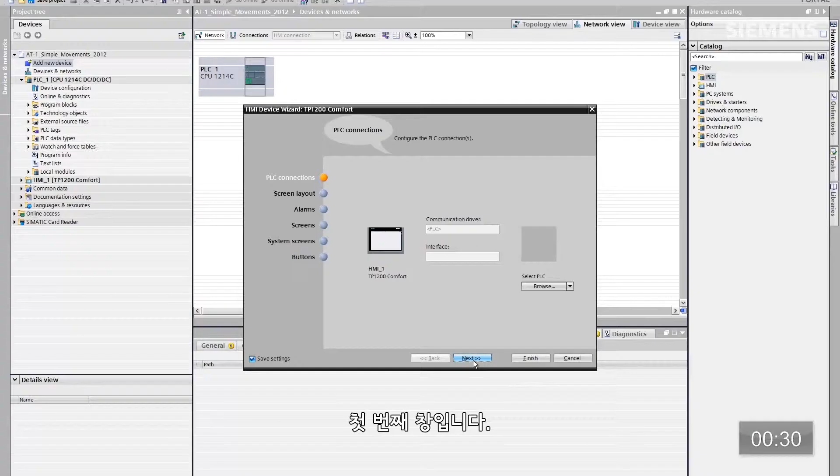So ultimately what the portal is doing for us at this point is actually creating a wizard for us. We're going to have a pop-up box that easily walks us through the entire HMI architecture we want to use for this particular system. There's a PLC connection as the first button, we're not going to use that. We don't care. Click on Next.

You can change the background color here, screen title, navigation field, date, time, logo, whatever. We're going to leave those defaults. Here's the alarms. We're going to keep the defaults as well.

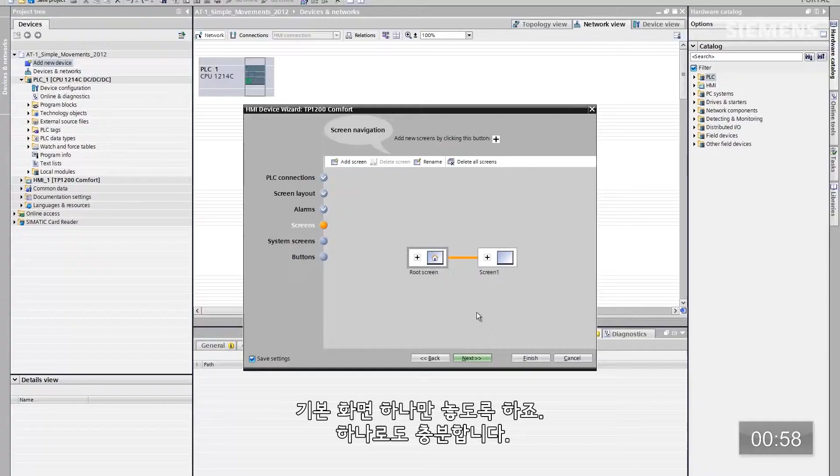The screens. Here you can actually create your standard architecture of your screens. That way every single time you have a new HMI you can easily go through the wizard and create those screens very fast and efficiently. We're going to leave root screen and screen 1, that's no problem. System screens, we're not going to use any.

And the buttons, as you can see, for instance, for this application I want to move them to the left instead of the bottom, and I can easily manipulate the system buttons back onto this with just dragging and dropping them on. And there are my system buttons on the left-hand side now.

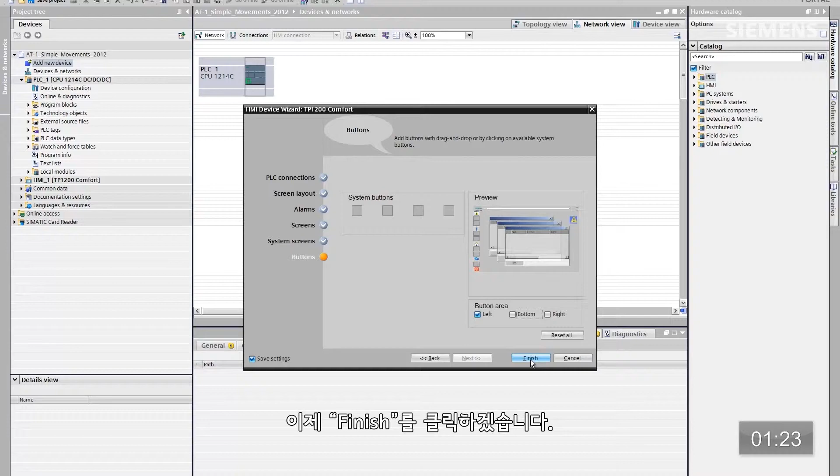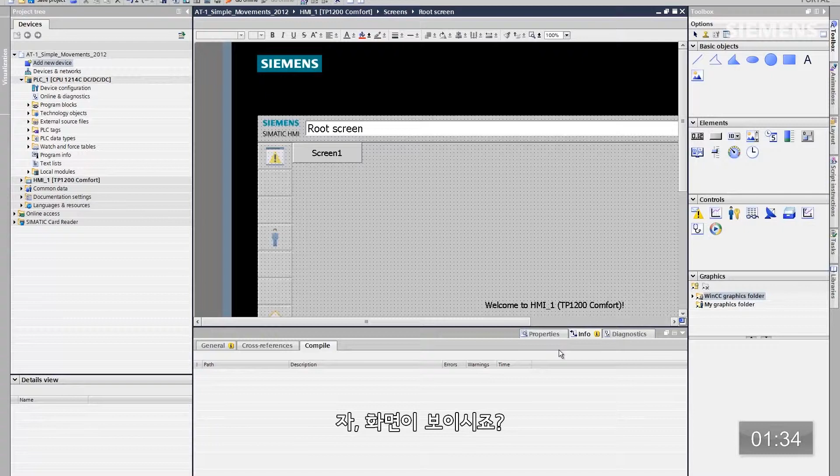At this point, I want to click on Finished. So ultimately, what the portal is going to do for us is going to give us a photorealistic view of this HMI and the screens we just created. Here they are. Let me minimize this and go to Fit to Screen.

So here's our root screen. If we want to add a new screen, all I got to do is go back here in the tree structure and just double click on Add New Screen. Again, it'll give us another photorealistic view of that new screen.

Click on Fit to Screen, and for instance, if you want to change an attribute of that screen, now that I have focus on it, I can right click on it, go to Properties, or for instance, if I want to change the name, that's what I want to do. Change it to 2. So now I have my root screen, screen 1, screen 2.

Okay, if I want to have navigation buttons for this root screen, all I have to do is drag and drop them on. There's root screen. There's screen 1. Now I've got my navigation buttons.

Okay. Now that I've accomplished the new screen and all the standard HMI architecture, what about actually tying it to the current code? Something I want to show you real quick. If I go back to Device and Networks, you'll see now I have my current automation architecture including the new HMI, but they haven't been networked together yet.

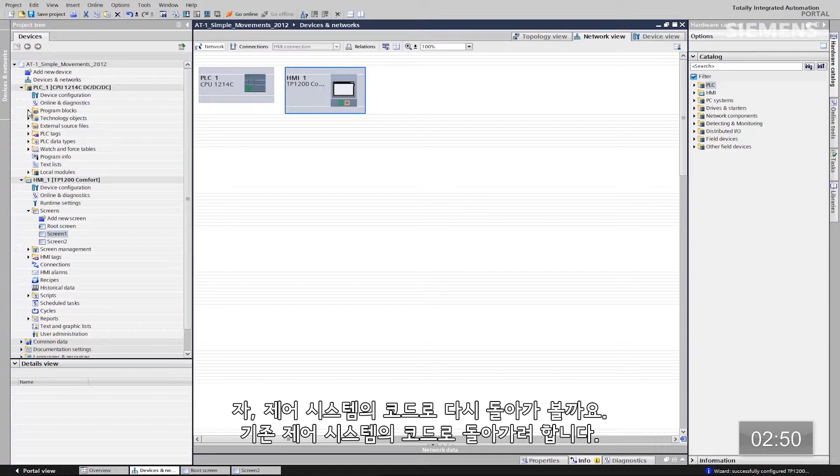Well, if I actually go back to the code of the current control system, program blocks, main OB, let's double click on that. Now that I have the code of the automation architecture, I want to give focus to the root screen and choose split screen. So now I have the actual brand new root screen as well as the code from the current automation architecture.

If I want to tie them together, what I want to do is just go grab a bit field from the code, drag and drop it on. And you see I get these little alignment bars just like you get when you do anything in PowerPoint. That way you can easily take boxes and make them align the way you want to.

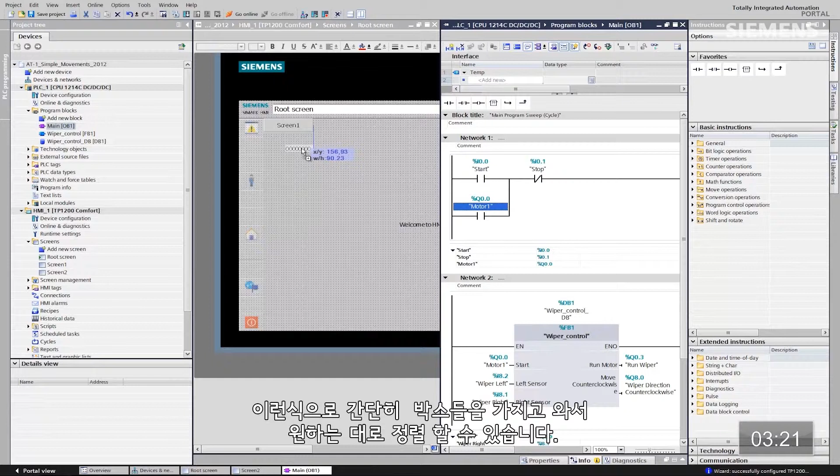If I want to resize, refit this bit field, all I got to do is go grab one of the corners, drag it to wherever I want it to go. If I want to actually do an attribute change, just give focus to it, click on Properties.

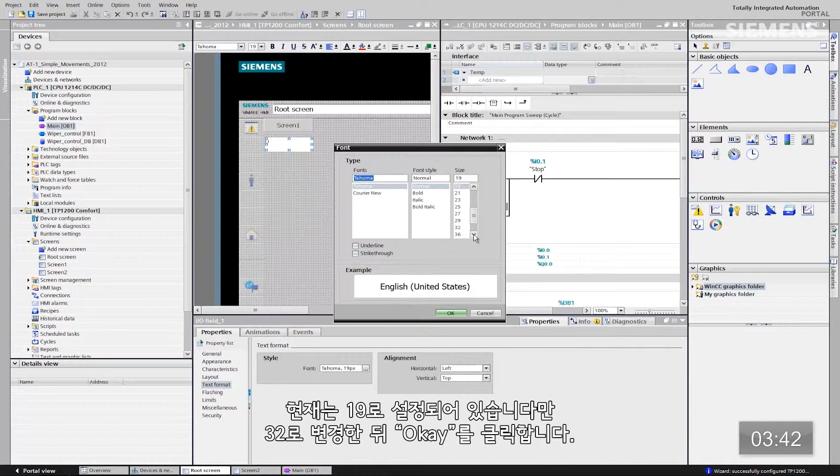Let's change the text size, for instance. Instead of 19, we want to use actually 32. Click OK, and I also want it to be centered. So now I've changed the attributes of this I/O field.

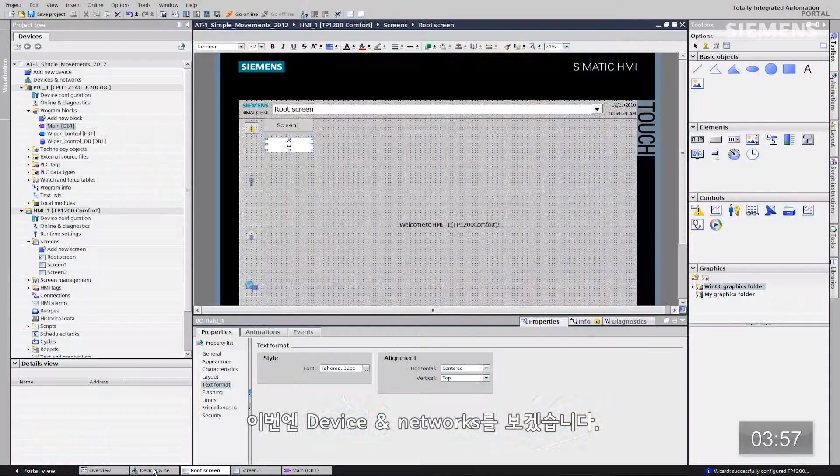Let me click off the split screen and let me show you the device and networks. So now if I click on this little icon here, Show Address Labels, the moment we pass that I/O field from the code to the actual HMI panel, it automatically created the Profinet network, the IP addresses, device names, including even the logical connections. It did everything in the background for us. That's how smart the portal really is.

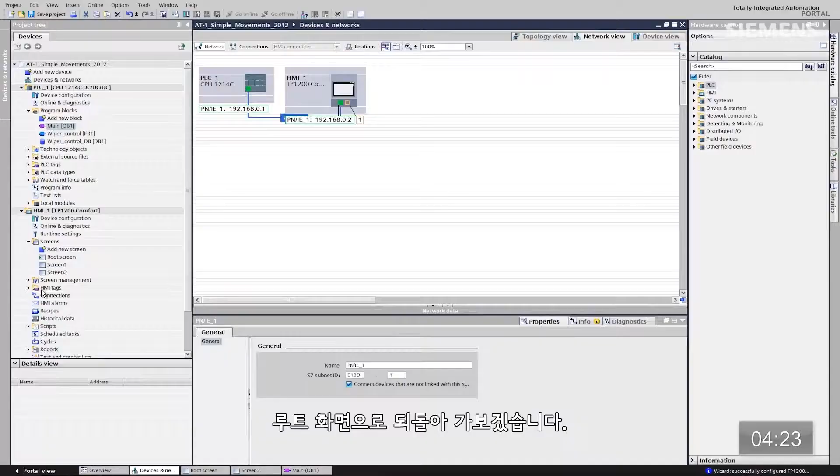Okay, so the network is now complete. How about the actual control? Let me go back to our root screen. Let me drop this down and let me go to our libraries. So now I want to add buttons and switches. Let me give focus to that.

So ultimately we're going to launch a library of different types of buttons and switches we could use for controlling. Now that we have them launched, let me go down to the rotary switches.

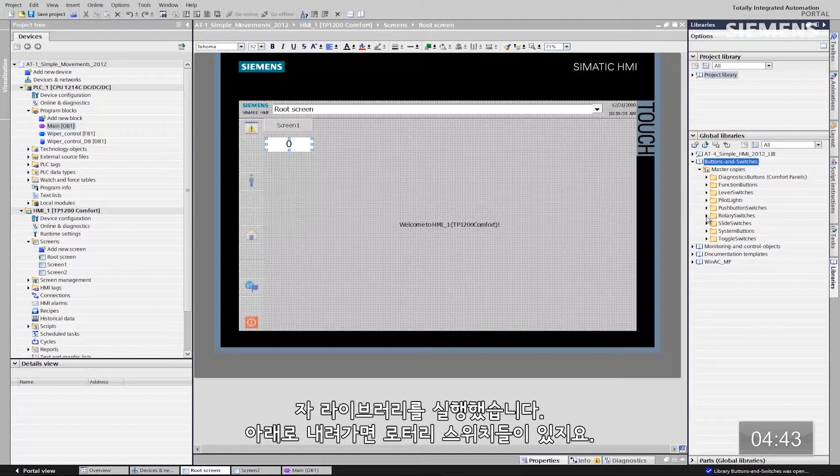Let me drag that on, resize, refit, however I like. And then I can use the alignment bars to make certain everything looks good on this HMI screen.

Give focus to it, right click, properties. What I want to do is go to general, go to the tag, and since I know the code from the current automation system, I know exactly which tag I want to use to tie to this rotary switch so I have actual control between the two systems.

So let's just type motor 1. That's the one I want to use. Use smart type. There's the tag, so now our control code from this rotary switch to the actual code itself has now been tied together.

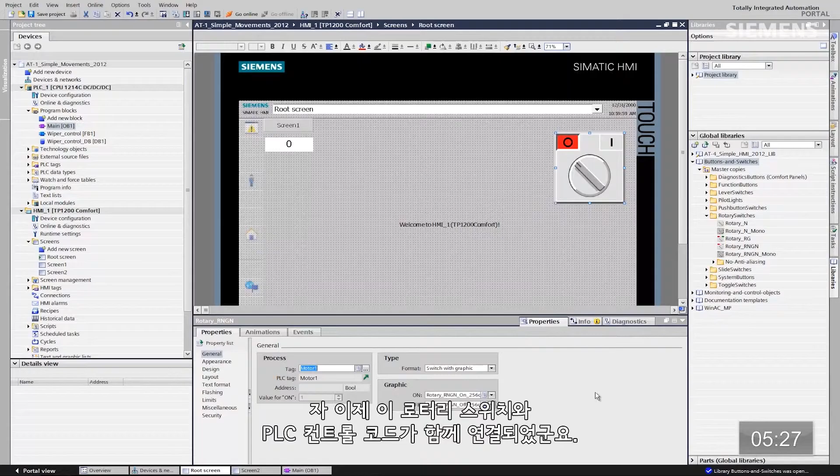Okay, how about animations? Let me give focus to this, and let's choose that library. So we have the ability from the global library concept to take any kind of graphic, animation, whatever you want. You can make it exactly how you want on your HMI panel.

Once you've done that, you can save the global library, and every single time you have a new HMI panel come online, you just drag it onto the panel, and you're actually completed and done. All you got to do is tie it to the code.

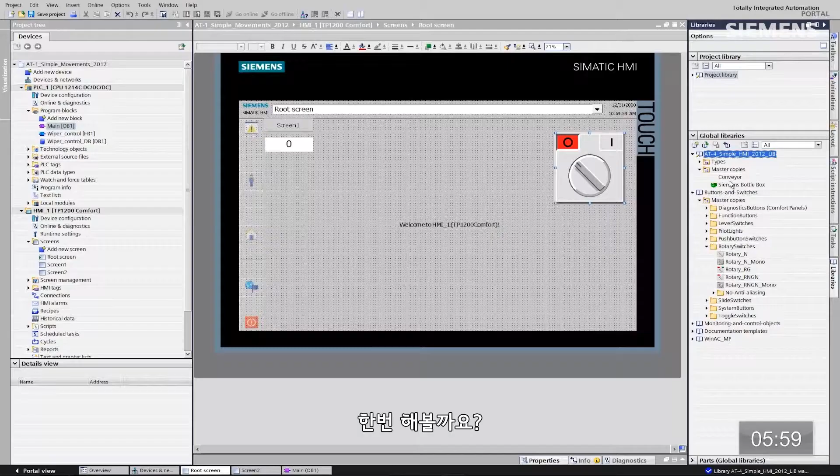Let's do exactly that. Let's drag this conveyor down. So we're going to have a conveyor on this panel. Resize, refit.

And I'm going to have a Siemens bottle box. Now that I have focus on him, I want to right click and go to properties. Go to animations, and click on horizontal movements.

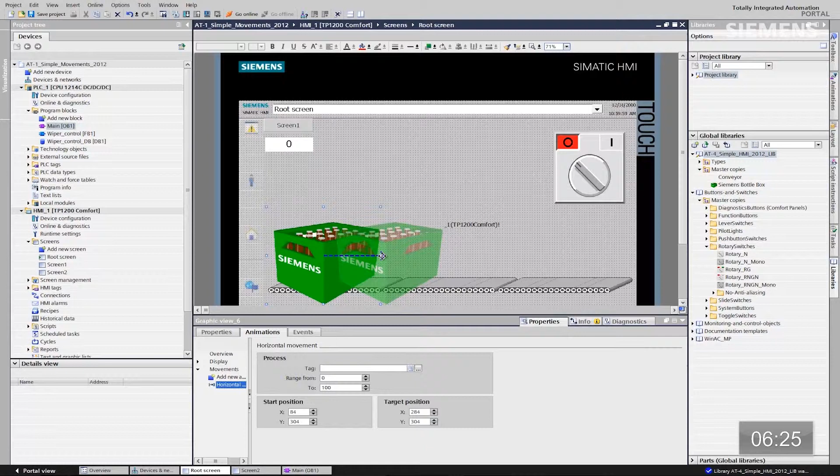So I can do an on-the-fly animation of a horizontal movement. It gives me a shadow box plus an arrow. If I go over here and give focus to it, drag that arrow over to the end point. So there's a point of start, there's a point of end.

And this is going to be tied to an analog value. So let me go down here and type 27,000 because this will be an analog word. And the start point is going to be 1,000. However, I don't have a tag I want to use from our analog inputs. So let's go do that first.

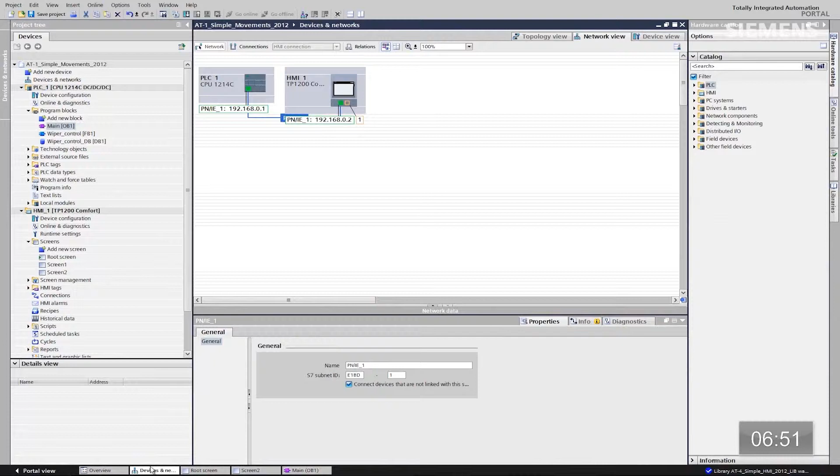Let's go back to our device and networks. Give focus to the actual CPU. Click on device view. Now give focus to the analog card. And you'll see that we have analog input word 112.

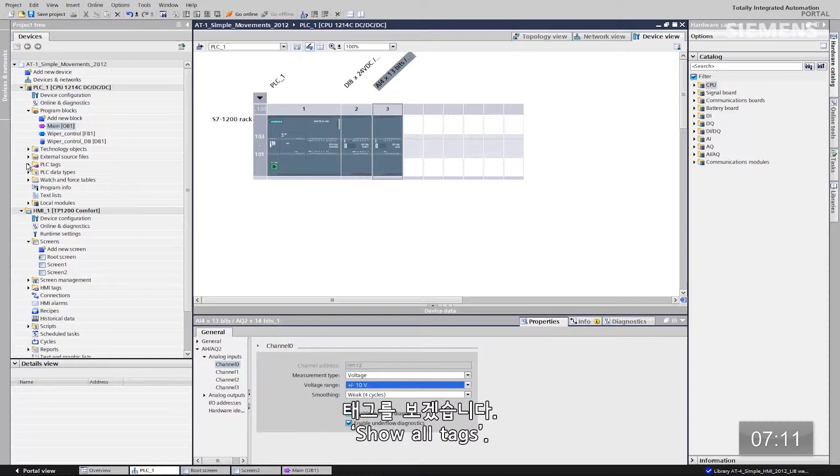That's the one I want to use. I'll also go back to a plus or minus 10 volts so that I have a full range of that analog word. Let's go to our tags. Show all tags. As you can see here, all I have to do is type IW112, click enter.

At this point, the tags will give you the possibility of creating the actual data type as well as the tag name for that analog word automatically. You don't have to do anything. I'm going to use this current tag it auto-created for me.

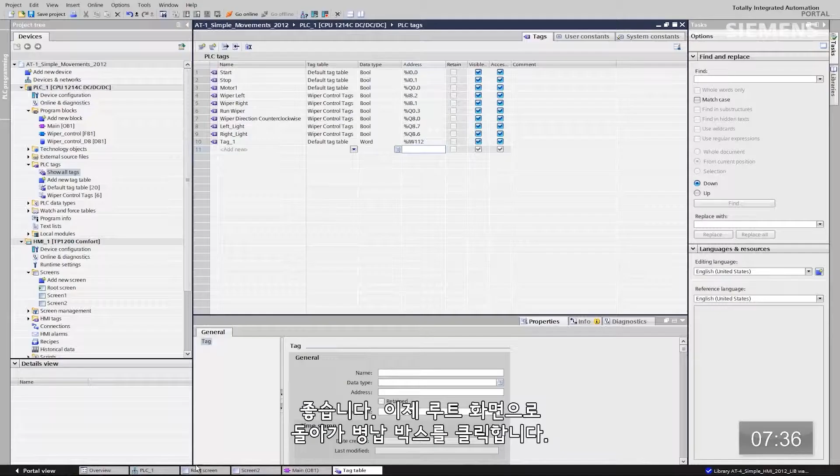At this point I can give focus back to the CPU, click the download arrow button. What the system will do now is go out and search the network and try to find this automation system. It's going to give us a dialog box over Profinet. He's searching, he has found the IP address of that controller.

I can actually click on the flash LED button. So now I've clicked on that. It's actually going to go back out over Profinet. It is the correct controller at this point.

I can click the load button. So now he'll do a quick compilation of this analog word and this tag and the logical connection over Profinet to the control system for us. Click on load. Now we've loaded that simple connection.

What I want to do now is give focus to the HMI, and you'll see this little box up here is called the Start Simulation. I'm clicking on this. Ultimately we have the ability to virtualize an HMI panel.

You don't have to have the physical hardware to do it. We can tie that directly to the automation system and prove out the fact that that system works before you have to actually go out and buy the hardware.

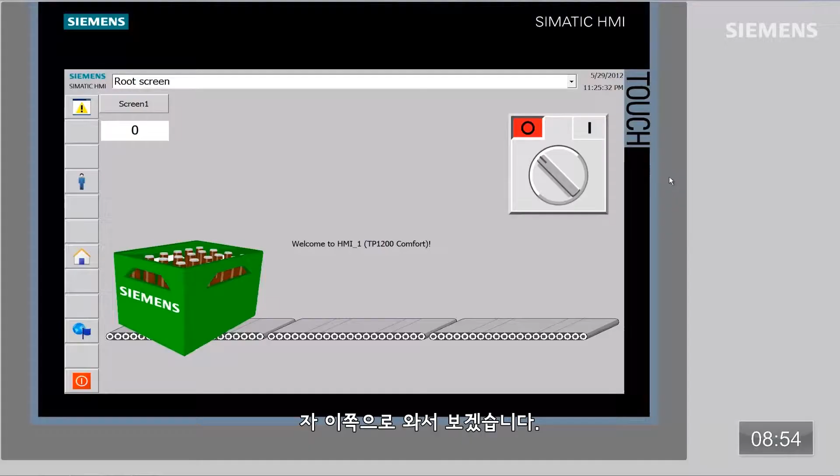Let me give complete focus to it. So you can see here we have the virtualized panel at this point. Our I/O field is 0 and our switch is in the off position.

If I click on the switch, you can see our motor is running now and our I/O field's gone to 1, so that means that we are in a run mode. If I turn that switch off, you can see everything has gone back to a steady state and it's stopped.

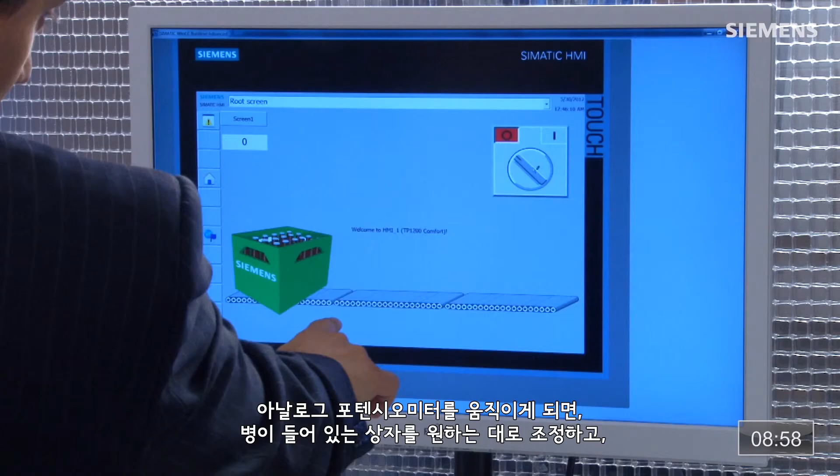If I come back to the analog potentiometer, I can come over here and move the bottle box, and I'm able to do the entire animation of this bottle box, including all this HMI. I did it in a matter of minutes. Now that's engineering efficiency.